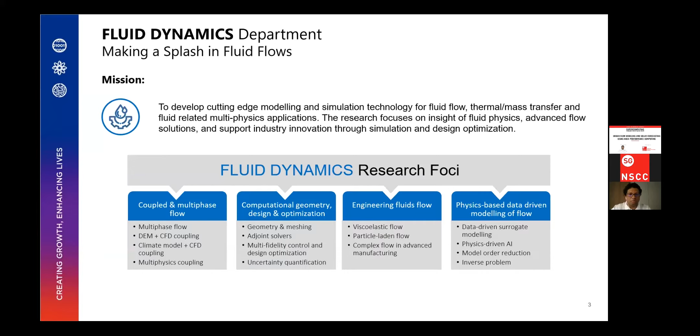And in terms of why do we need to study it, it depends on the application actually. Say for example, if you're a meteorologist, you would want to study the entire span all the way up to the free atmosphere, because you want to model all the physical processes so that you can predict the weather for tomorrow. Now, if someone wants to study the urban heat island, they don't need to go all the way up there. Probably they can stop at the capping inversion and study all the physical processes which happen below that. Then if we come all the way to the ground level, if you're interested in the pedestrian level thermal comfort, you need to study only the surface layer.

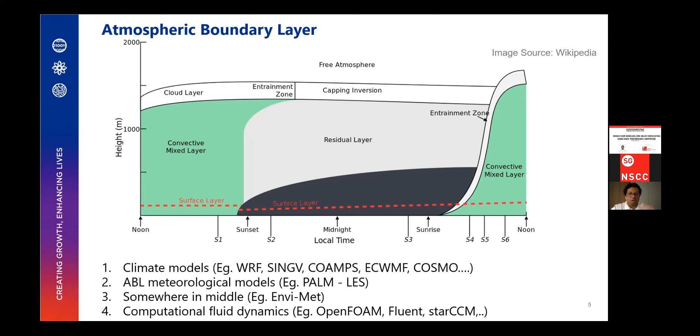So today I will focus on computational fluid dynamics because that's what we have been doing for a while. In terms of restrictions, computational fluid dynamics is applicable only within the surface layer, and with some modification, you can extend it beyond that. So basically the Coriolis and geostrophic forcing are neglected. And the most important thing is the Monin-Obukhov similarity theory can be applied. I'll come to what that means shortly.

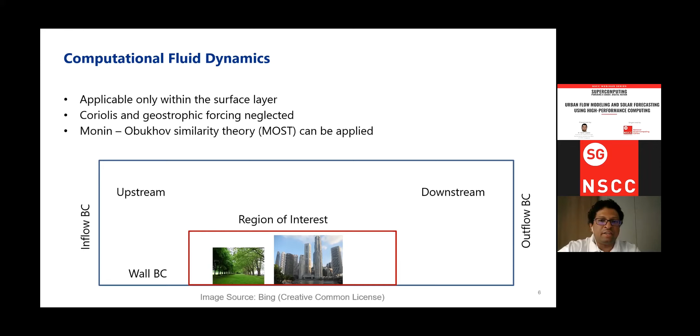In terms of a typical simulation using CFD, the components are: the governing equations within the domain, the inflow boundary conditions, the wall boundary conditions, the upstream region, the downstream region, and most important, how do we represent the different structures from buildings to roads? In terms of the governing equations, I will not go into the details. We solve for the conservation of mass, momentum, and energy. And because we don't resolve turbulence explicitly, we need a model equation for turbulence.

And for tree representation, we don't represent it exactly. I will touch on it a little later. And then we have to model the radiation transfer, and if needed, gas dispersion and water vapor transport. And also, if we are more interested at the building level, we will go into the building heat and moisture transport. And if humidity is included and there are a lot of trees in the region of interest, we consider the tree shading and evapotranspiration.

Anthropogenic heat generation is basically the heat generated from air cons and automobiles. There are no exact equations for those. So the only way we can include them in the modeling is if field measurements are available, we can use them as a heat flux to drive the energy equation. Now, in terms of the codes, the number of these physical processes which are modeled really depends on the code. So depending on what you're interested in, you have to choose which code you want to use.

I'll start with the inflow boundary condition. So the inflow boundary condition within the surface boundary layer is specified using the Monin-Obukhov similarity theory, or MOST. What basically it says is within the surface layer, the wind, temperature and humidity can be represented by the equations shown in the slides.

Most people who have done CFD simulations are familiar with the log law. The extra psi terms are basically a measure of the buoyancy effects in the atmosphere. So during the daytime and also late in the night, these terms become important. In terms of what these parameters mean, u star is referred to as the friction velocity, and we calculate it from some reference measurement. And z naught is the Davenport roughness length. It's a measure of how much drag the surface exerts.

For example, the value of z naught is much lower on a water body compared to the land because the sea surface exerts lower drag. And L is the Monin-Obukhov length, which is a measure of how important the buoyancy effect is. And psi and phi are called stability functions. They have a more or less universal form.

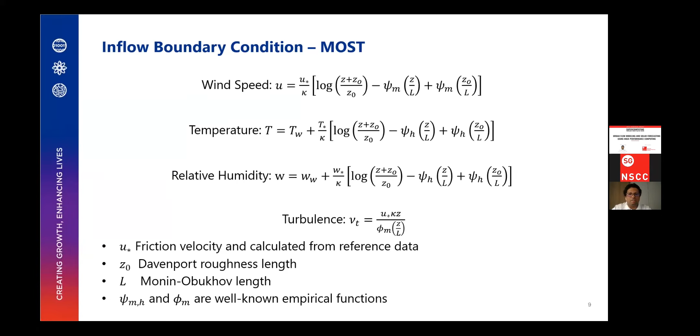In terms of the wall boundary conditions for wind, turbulence, and humidity, we use the same as what we do at the inflow. For temperature, we have to use what is called a surface energy balance. The equation I have shown here basically balances the incoming radiation with the heat generation due to buoyancy turbulence, the heat conduction into the building or soil, the latent heat flux if you have a water body, and the anthropogenic generation.

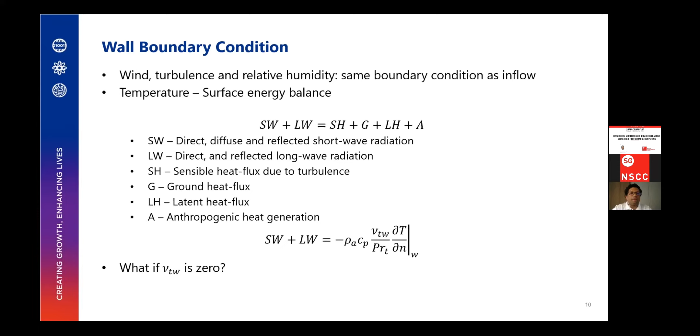Now, one of the problems in many CFD modeling tools is that the ground heat flux, the latent heat flux, and the anthropogenic heat generation are neglected. In that case, the equation simplifies to what I have shown below. In this case, if the turbulent viscosity goes to 0, the temperature gradient becomes singular. This is a problem which has to be carefully addressed if those other contributions are not included.

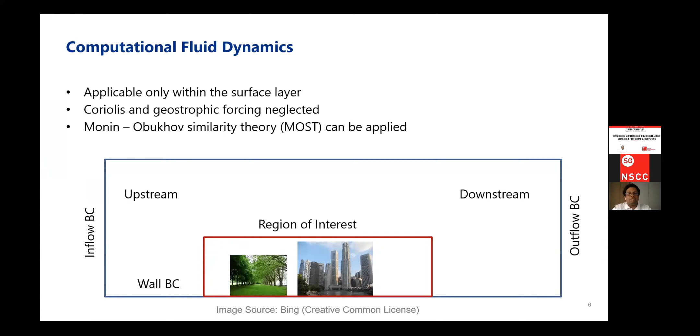Now, the upstream region we need because for most simulations there is a prescription of what is called a blockage ratio. The blockage ratio is basically the area of the region of interest to the total area of the domain. The reason this is important is the blockage ratio has to be less than a certain percent so that your results are not affected by the boundaries.

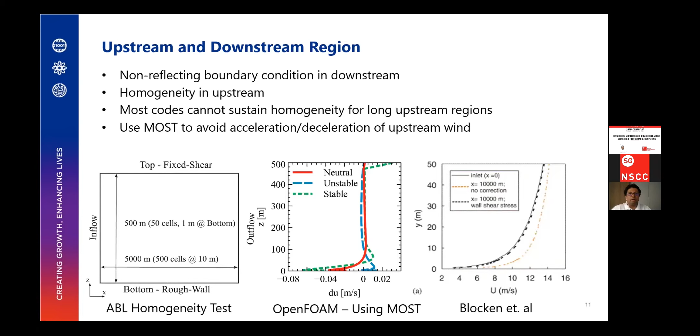Now, for the downstream region, the only requirement is whatever goes out should not be reflected back into the domain. Most codes have boundary conditions to accommodate that, so we don't have any issues with that. The upstream homogeneity is a little tricky because the boundary conditions that we use are approximate. There can be a numerical artifact which can cause acceleration or deceleration of the wind speed. If we use the Monin-Obukhov similarity theory, we don't run into those issues.

But MOST is popular only among the meteorological community. The CFD community doesn't care a lot about it. So this issue has been there and it still exists in most commercial codes. I show a test case, which is called an ABL homogeneity test. We specify the inflow profile and apply the necessary boundary conditions. Because in this case we have no buildings, no pressure gradients, or no forcing, whatever inflow velocity we specify has to be observed at the outflow.

In the second figure, I show the differences in the wind speed when simulated using the MOST boundary conditions. Neutral refers to when the buoyancy effects are not important. Unstable is the boundary layer we have during the daytime, and stable is the boundary layer we have during the nighttime. If we use the MOST boundary condition, we see that the differences in the wind speed, and, though I haven't shown it here, even the differences in the turbulence, are negligible.

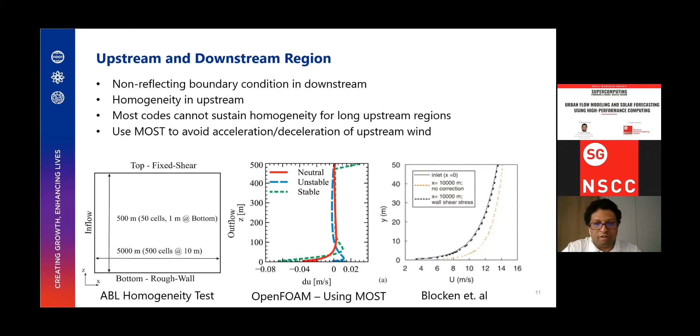In terms of representing structures, buildings are represented as 3D CAD models. The level of detail depends on the code. If you use CFD codes, we can even represent the balconies and everything, assuming you have the computing power to perform the simulations. The roads are represented as 2D surfaces. Terrain, in most cases, is neglected because when you have terrain, you also have to ensure that the buildings are aligned with it.

Now, trees are a little tricky to represent because trees have trunks, branches, and leaves. It's computationally impossible to represent the leaves. So we use what is called a porous media model. The idea is that the interaction between the tree and the wind is just through the forcing. What if we can come up with a simplified model which mimics the drag exerted by the tree on the wind? That's the porous media model, and that's what is usually used to represent trees. Shading and evapotranspiration are usually not available in most CFD codes.

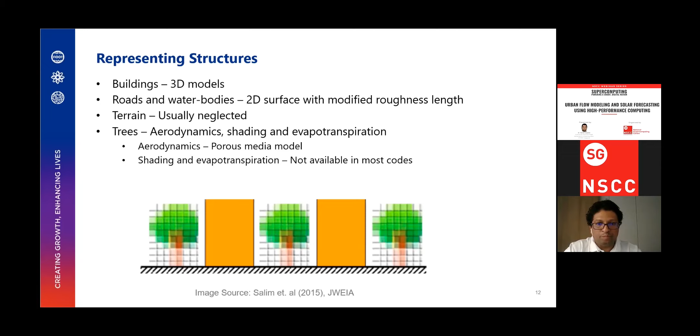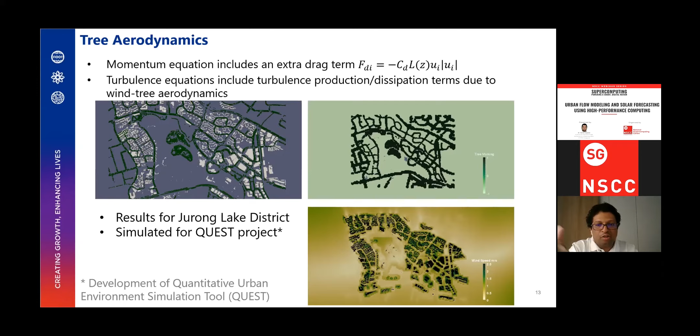And the figure on the bottom shows the wind speed at 2 meters. What you can see is in the areas where you see those white patches, they basically represent the drag effect due to the trees.

And one other thing which has to be done when you are doing urban flow simulation is the validation and verification part. Now, the first step of validation, which most of us do, is validating with the wind tunnel. Wind tunnel validations are relatively easier because you have precise control on what you specify at the inlet, what is the surface boundary condition, and you can also have a number of measurement points upstream and downstream. But when it comes to validating in the field, it becomes much more challenging.

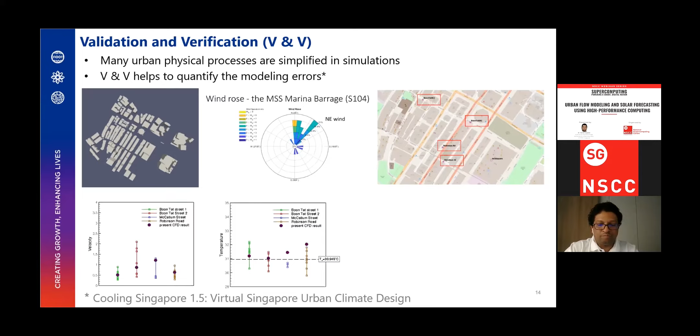The next part that I'm going to talk about briefly is enhancing the usability. As a part of the development work in the fluid dynamics department, we have been doing significant modifications to the open source code OpenFOAM for urban flow modeling and also for other applications. In here, I'll just touch briefly on the urban flow modeling part. This development was inspired mainly by the projects we did for the URA and HDB. When we did the projects, what we understood was the way we look at things and the way the planners look at things was very different.

So we asked ourselves the question, is it possible for us to take all the work that we did and make it available in a simplified form that they can use for their application? And that's how all our new projects have been developed. In terms of our development work, we have our backend framework, which we call the Scout core, which is basically all the OpenFOAM modeling enhancements that we add. On top of that, we have a Python wrapper, which allows us to link to the GUI, and once we have the Python wrapper, we can build a GUI on top of that. I will touch on two of the GUIs that we did recently.

So in terms of what do we have in Scout core, in here I touch only on the topics which are specific to what IHPC has done. In some cases, what we created may also have been done by others. It's just that we were not aware of. And when we are confident of the tools that we develop, because all these are developed within the open source framework, we make it available to the public.

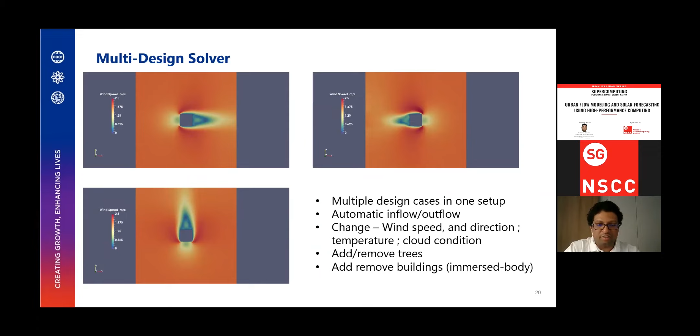And first, I will talk about two different GUIs that we did recently. The first is Scout GUI. This was something we did for the Maritime and Port Authority. So the idea here is, when we started the project, we thought, okay, we will do a nice GUI on a Linux system and give it to them. And the MPA personnel said that they prefer a GUI on the Windows system.

And for people familiar with OpenFOAM, it's usually well built to run on the HPC system on Linux. Even though there are Windows builds, if we want to run computationally intensive cases, it's better to run on Linux. So in Scout GUI, what we did is we designed a Windows client which does the pre-processing and user interaction, and it automatically connects to the Linux server and runs the simulation and post-processing.

And the network folder we mounted using Samba. So for the user, it's just another network folder on his Windows machine. And the background solver execution and the data transfer was through transmission control protocol. In the sense, the user can set up the case, he can start the simulation, he can shut down the GUI and go. When he comes and reopens the GUI again, the case will either still continue running or it would have finished running.

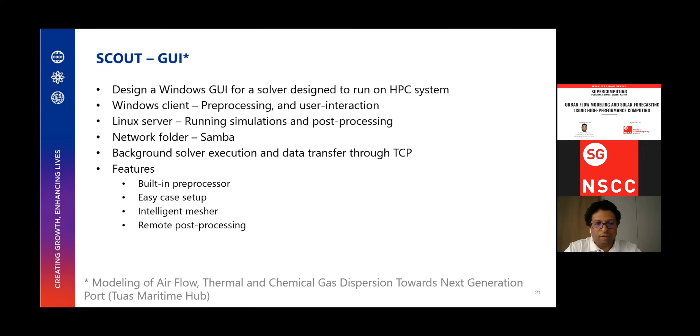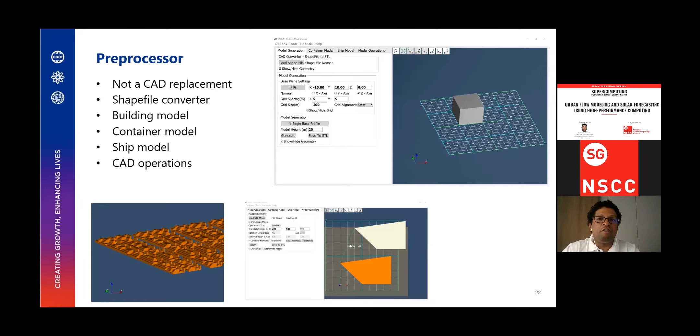And one other thing that we built into the system was a preprocessor. The preprocessor is not fancy. Basically, it was built so that whatever capabilities MPA wanted within the system for using it, we built into it.

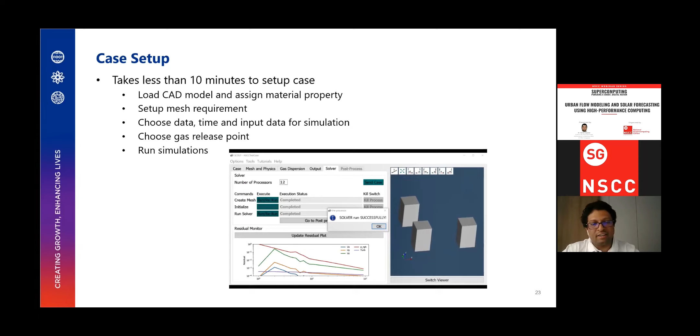In terms of the case setup, it takes less than 10 minutes. So what you do is you load the CAD model, you assign the material properties, then you set up the mesh requirements, you choose your day, time, and input data for simulation. The simulation can be both steady and unsteady. And then if you want gas dispersion, you choose the gas release point, and then you run the simulations.

One of the most important works we built into the system was what we called an intelligent mesher. When it comes to meshing, unless people have used CFD or other computational methods extensively, they are not going to be familiar with setting up the meshing. The idea of this intelligent mesher was, what if we can make the interactions simpler and allow the user to enter the numbers that he is comfortable with and do all the workhorse behind.

So the way the meshing works is, once the user loads the STL file, based on the size of the STL file, we generate an automatic spacing requirement. And there is a button in the GUI we call the mesh guide. So using the mesh guide, the user can input numbers and see how the mesh would look for his resolution.

Say, for example, if the horizontal meshing is 16 meters and the user wants a resolution of 2 meters, all he needs to do is, in the STL refinement box, set a refinement level of 3. So each level of refinement reduces the mesh size by 2.

And the difference between the STL and the gap refinement is the gap refinement refines the mesh only in one direction. Say, for example, if you have a thin gap in a single direction, you can use that. And one of the things there is no control over is the vertical spacing, because if you need to ensure ABL homogeneity in the upstream region, vertical refinements can cause acceleration or deceleration of the wind.

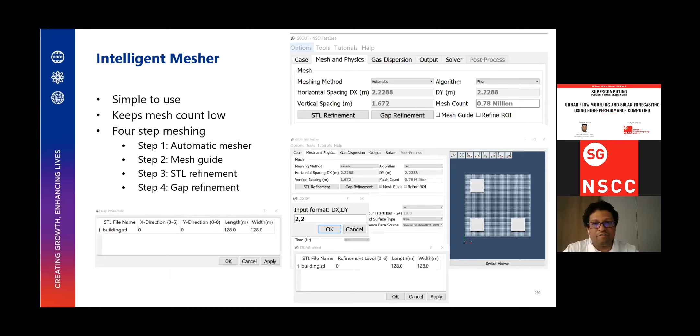This is just an example of the simulation that we did. In this case, you can think of it as a toy problem, in the sense we obtained the HDB building information from the GitHub source. We classified it using the surface splitter, and we just ran a quick simulation with 16-meter resolution near the buildings. The advantage in this case, because of the surface splitting, we could reduce the mesh count to 36 million grid points, and we could even run it on our workstation.

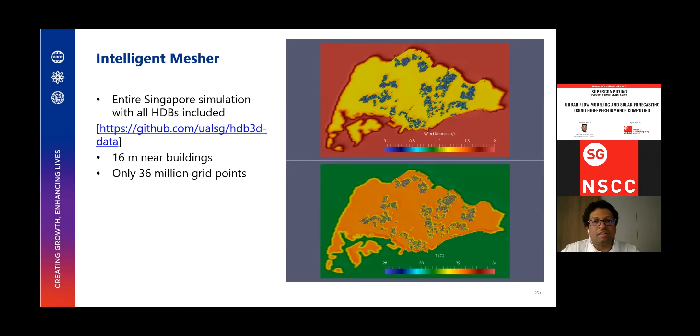And also within the system, we have some basic post-processing. These are not fancy either. The idea is it will help create all the basic post-processing you need to write the reports. One of the advantages of this post-processing is it will allow the user to post-process big data on his Windows machine. For example, if the case is huge, you can't load it on your Windows machine. But using the post-processor, you can generate the slice of data you need, and you can project it back to the GUI. We are also currently exploring whether we can use a similar technique on the NSCC to visualize the data.

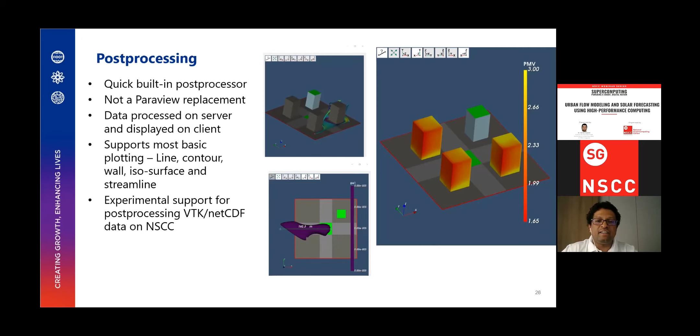The other project that we did is what we called a Scout widget. Some of you may be familiar with the Virtual Singapore system. In the Virtual Singapore system, you have both the preprocessor and post-processor. But one of the challenges there is, how do you run the CFD on that? The difficulty is that system was not set up for running CFD.

So what we did is we created a CFD widget of our Scout framework, and we integrated it on the Virtual Singapore system. The CFD widget actually resides on a different machine within the A*STAR framework, and it connects to the Virtual Singapore system and runs the simulation. Something we have in mind for the future is to develop a single web server on which we can mount all our projects.

Now I'll touch briefly on solar forecasting. I will just say that we are not experts. We are just beginners in solar forecasting, and SERIS is doing a lot more work. Our idea was to look at solar forecasting from a user point of view, to see if we can create a tool which the user can use.

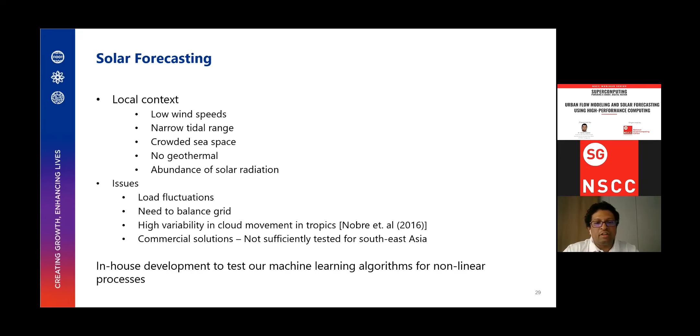Solar forecasting is important in the local context because we have low wind speeds and there is a lack of space. And also, one good thing which works for us is the abundance of solar radiation. Now, solar energy in Singapore is slowly building up, but once it becomes a more common source of energy, issues like load fluctuations and the need to balance the grid become very important. And one of the problems we have in the tropics is the high variability in the cloud movement. And to our knowledge, the commercial solutions have not been tested in the Southeast Asian region.

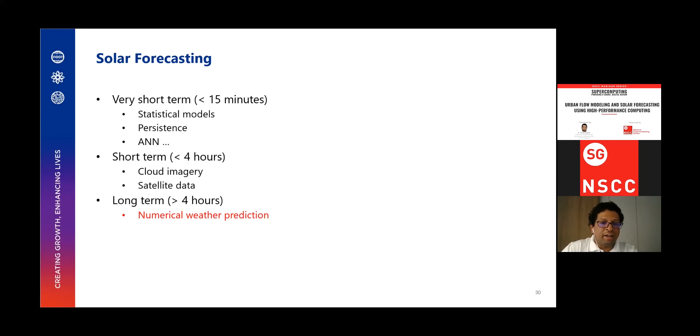So in terms of solar forecasting, you can classify it into three parts: very short-term forecasting, short-term, and long-term forecasting. Although the terms are misleading, this is what is used in the literature. So for the very short term, it's mostly statistical or machine learning based models. For the short term, cloud imagery or satellite data can be used, which we are not familiar with. And the long term, which we are more interested in, is usually performed using numerical weather predictions and corrections on top of that.

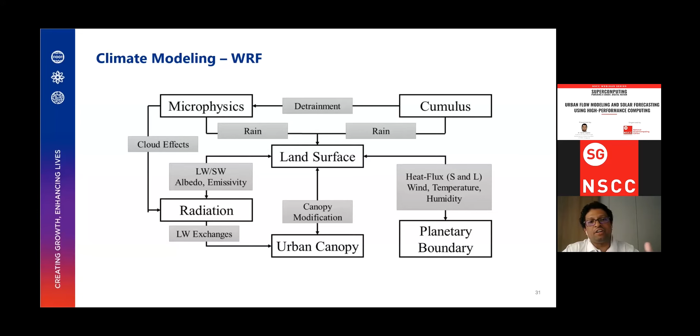So this is just a brief slide of how the climate modeling works. If you are more interested in that, you can attend the next talk in the webinar series, where they will share in detail about all of this. The reason this is important is, if you are interested in predicting the solar radiation, you have to understand the limitations of this so that it can improve the accuracy of the prediction.

Now, in terms of solar radiation, we performed it using the open source code WRF. In terms of model choices, you have many different options for the radiation scheme. And microphysics is basically the representation of the cloud and water content and the other thermodynamics within the system. And the cumulus scheme is used to resolve the clouds which are smaller than your grid cell. So the first question is, how do we downscale? When you want to run WRF simulations in the area around Singapore, you start with a much larger area so that you get the driving physics, and then you narrow it down to Singapore.

In terms of the day ahead forecasting issues, based on our limited tests, what we observed is there is a systematic bias in the tropical region. And so one of the things which we are looking at, which I think a lot of people are looking at, is a hybrid approach where we get the output from WRF and we use machine learning to correct the predictions. These are some of the initial results that we got.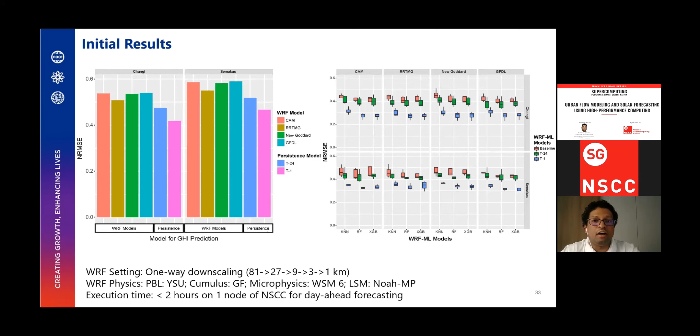Now, the figure on the top right shows the normalized root mean square error when it is corrected with machine learning. Also, we have included cases where we had the day ahead data, and in the last case where we had the hour ahead data as a surface feature to calculate the machine learning correction. What we observed, and I think this has also been observed by many people, is that the closer you have the corrections, the better you can get in accuracy.

So one other thing that we are also looking at is, okay, we have this WRF and machine learning. Once we have some confidence in that, will it be possible for us to create a tool that we can provide for people to use? So that's the idea behind the development of the SENPAI framework in the SCOUT Cloud. The way it works is, the user enters the latitude and longitude of his area of interest, and then it creates a database, and he can use it to do day ahead simulation using WRF.

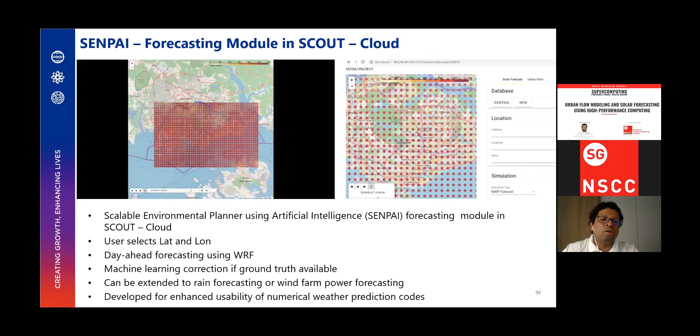And so it can run in 2 modes. It can run just pure WRF, or it can do machine learning correction if MetStation or real-time data is available for correction. The same thing can also be extended to rain and wind farm forecasting. And one of the things I haven't talked about, and I have to because that's the focus of the talk, is the use of high performance computing. In simple words, the more processors, the faster you get the results.

I would like to end my talk. I would like to mainly acknowledge 3 folks. Kianvi Lim was the student who tested the first version of our CFD software and provided inputs, especially for developing the Berkeley thermal comfort model.

Nigel, he ran all our WRF simulations as a part of his FYP project. And junior college student Shaq, who tested our GUI in his school, where he was interested in studying how the temperature on the building surfaces changes when he changes the material properties of his school.